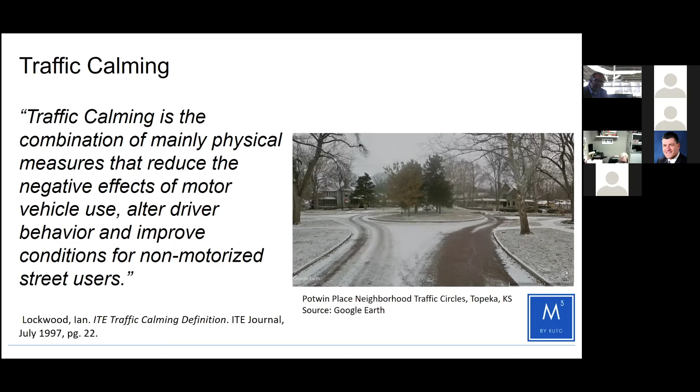So this presentation is about traffic calming. I'm going to give an overview of traffic calming before we get into more about the North Vine Street project in Hays. So what is traffic calming? Well, the definition in the ITE journal back in 1997: traffic calming is the combination of mainly physical measures that reduce the negative effects of motor vehicle use, alter driver behavior, and improve conditions for non-motorized street users. So it's using things that'll impact driver speeds like geometry or narrowing lanes, or changing the vertical alignment or the horizontal alignment, things that are just going to get drivers to slow down. And what that does is make it more interactive with pedestrians and bicyclists and just makes things overall safer.

What I have here on the screen is a photo of some traffic circles in the Potwin Place neighborhood in Topeka. The homes in this neighborhood were built in the late 1800s. From my knowledge of this area, these were actually put in to do traffic calming for horse and buggy, so that horses pulling a buggy wouldn't just take off and go loose through the neighborhood on these streets. So literally they built these traffic circles, and these are brick streets, for traffic calming, so they can control those horse and buggies. So traffic calming has been around a long time, and we'll go into more details here.

So again, why would we do traffic calming? Well, when you control traffic speeds, if there are pedestrian or bicycle crashes, the chances of survival go way up if the speeds are low, and it just makes sense. As the speeds come down, you have more non-severe injuries. As the speeds go up, you have more severe injuries. And then up around 35 miles per hour and over, if you get hit as a bicyclist or a pedestrian, unless certain circumstances arise, it's not good. It's probably going to end up in a fatality.

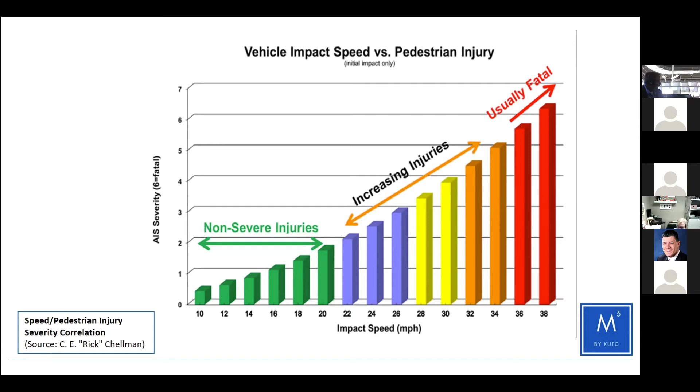So I've got a short video here that talks a little more about traffic calming. It's about 4 minutes long.

Traffic calming is any change we make to a street so that motorists drive in a more civil fashion. What that does is it signals to drivers that they need to slow down, be aware that they aren't dominant in a certain environment. And traffic calming is infrastructure to make sure that happens. Is the infrastructure going to serve the pedestrian as well as the automobile, or is our pedestrian infrastructure going to continue to be shaved down so that more vehicles can move as fast as they want? Adding bike lanes.

Anytime we take some of the physical width out of the street, we're really doing traffic calming. In New York City, they've recently released studies to show that streets that have bike lanes on them reduced killed or significant injured crashes between vehicles and pedestrians by up to 40%.

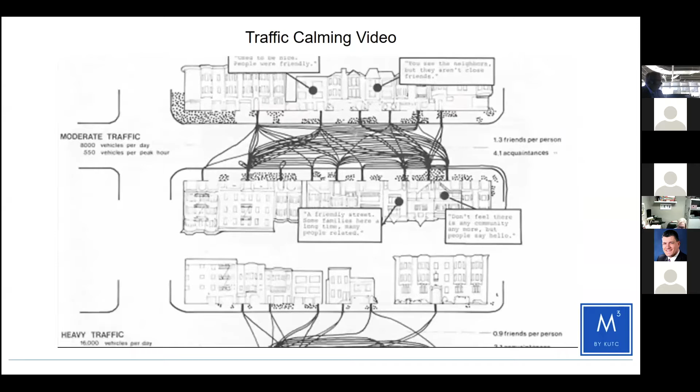Traffic calming actually had its origins in the United States in Berkeley, or Donald Appleyard, the original researcher that did most of his work in Europe, brought traffic calming to the United States. We have mini circles, a number of curb extensions, chicanes, through streets, and a whole other gaggle of different treatments that have been tried and worked very well in Berkeley.

We were able to create this one-of-a-kind initiative on Marine Drive to radically narrow a street. Traffic would race down the street with huge population density on one side and all the Park District amenities on the other side of the street. So this obviously was a problem.

So the street was narrowed and bump outs were created. It's reduced heat holding infrastructure. It's made a profound difference in the ability to get to and from the park. And it's beautiful. It has become a wonderful, wonderful model for the rest of the city.

In New Jersey, there's a state law that says you can't park within 25 feet of a crosswalk. These two orange poles that are installed on the street, one in front of me and one behind me, are Hoboken daylighting poles, to physically prevent all but the most adamant drivers from parking in this location. The importance of that law and the importance of having these poles here is it improves the visibility between drivers coming down the roadway and pedestrians that are entering the crosswalk.

I'm standing just on the edge of a bicycle lane that's 5 foot wide on a street that was previously 16 feet wide for travel lane. That 16-foot wide travel lane is actually wider than the travel lanes on the New Jersey Turnpike, which have design speeds of 75 to 80 miles an hour. We made the argument that by putting in a 5-foot wide bike lane, you squeeze the travel lane of vehicles down to 11 feet. That's a much more appropriate lane width for vehicles in an urban environment, and so it has an inherent traffic calming effect.

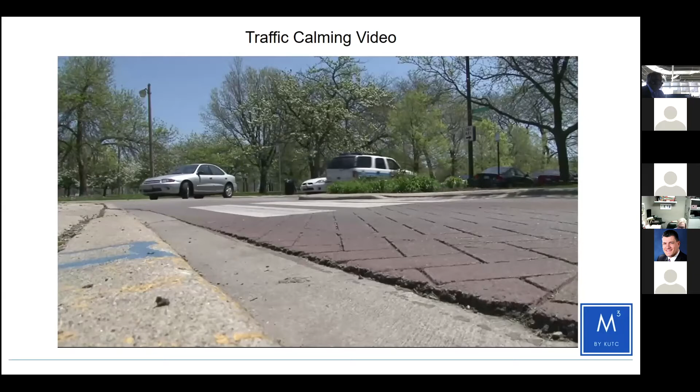Signs don't do the job. Even having police officers on the corner does not do the job. Altering the infrastructure to, as we say, create an even playing field, to force traffic to behave in a more civilized manner is the way that it has to go.

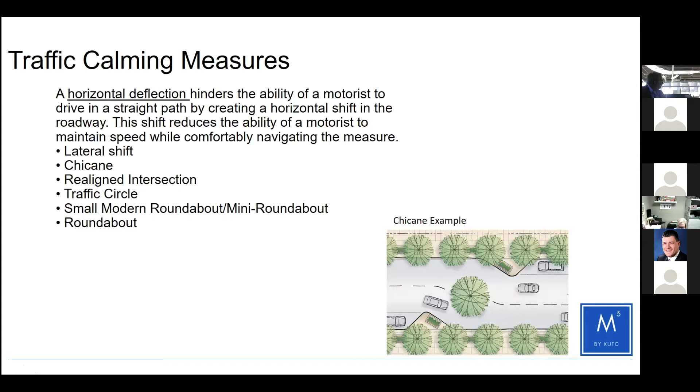All right, so that video gave a good overview of traffic calming techniques and reasons why it's so important. And so I just wanted to note a lot of the examples that they showed in the video. For instance, horizontal deflection are things that will cause vehicles to slow down. And here's an example of a chicane. So any type of lateral shift, realigned intersection or traffic circle, a modern roundabout or even a mini roundabout in more neighborhood areas, get the vehicle to change their horizontal direction.

Also, getting the vehicle to change its vertical direction. So things like speed humps, speed cushions, speed tables. Here's a raised crosswalk example here, a raised intersection, anything that will get the driver to slow down because they just feel like they need to go over the bump or the hump.

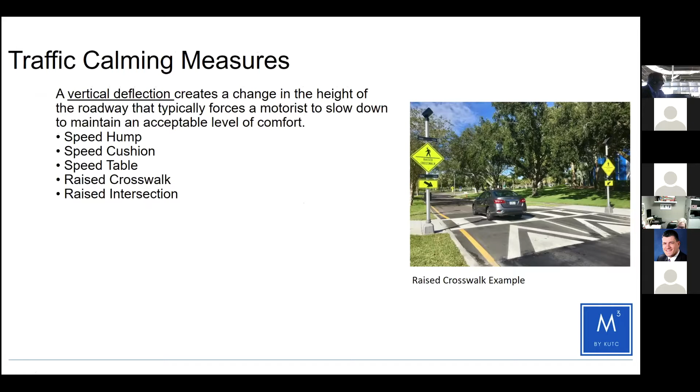Also, street width reduction. They talked about things like corner extensions or bulb outs at your intersections or crossings, chokers, median islands. Here's an example of a pedestrian crossing with a median island, which just allows some pedestrian refuge area through there, as well as some rectangular rapid flashing beacons.

On-street parking, anything that narrows that driving environment is going to get the vehicle to slow down. And that's why people feel comfortable driving 80 miles per hour on the interstate. It's wide open. And that's why you don't feel comfortable driving fast through the main street of a downtown city.

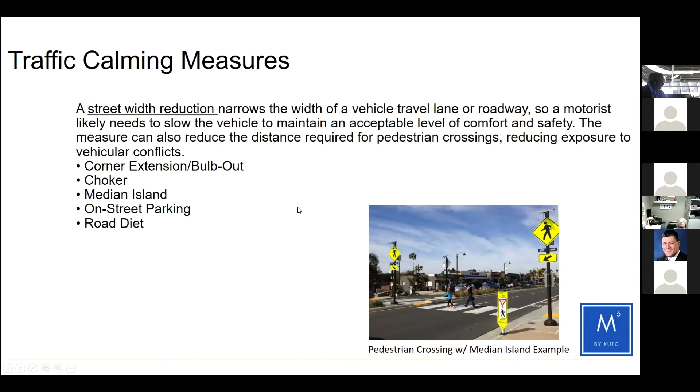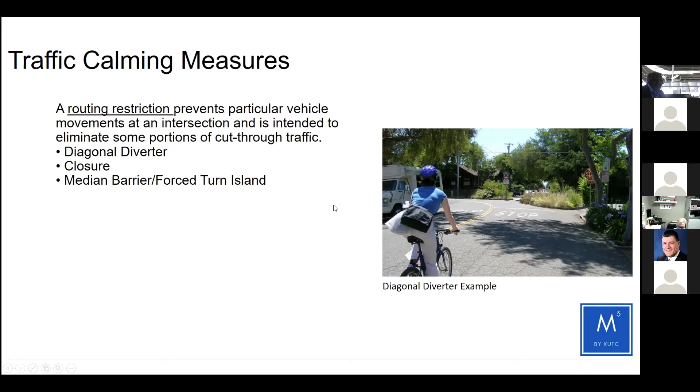And also just changing the intersection or changing the direction of the route entirely. So things like diagonal diverters. Now, this used to be an intersection that went straight through, but they've actually created some things here in the middle that would require drivers to turn left and turn right coming from this direction, but bicycles and pedestrians can get through. So anything like that is going to also slow vehicles down and divert traffic.

So one example leading up to the Vine Street project that WSP has been involved with is a corridor in North Kansas City called Armour Road. Armour Road is right in the downtown area of North Kansas City, but it's like a commercial area. And as you go east, it's essentially a MoDOT route as well that connects in with I-35 on the east side. So here you've got an arterial in a downtown city in Kansas City, a 4-lane section with left turn lanes. It's a signalized corridor.

It has a lot of crashes. The vehicles per day is like 15,000 vehicles per day. That's quite a bit of traffic for an arterial of this type. And they really needed ped bike improvements and a need for traffic calming. So that was the before picture. Here's the after picture where they've converted it to a 3-lane section. They've included on-street parking.

Traffic speeds have gone down by around 5 miles per hour. Crashes have been reduced and severity has been reduced. However, travel times remain the same, which is good. And there were some folks within North Kansas City that were very concerned that, okay, you're going to take a 4-lane and make it a 3-lane. You're taking away 2 through lanes of traffic. It slowed folks down, but it made things safer, and it didn't really change the travel time. And the benefit to cost of these improvements was around 18 to 1.

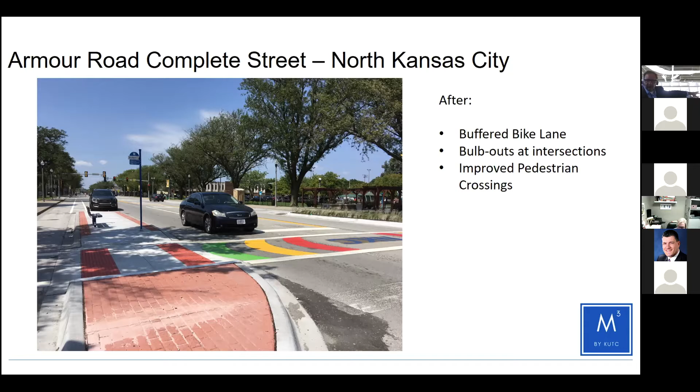Not only that, but you have a buffered bike lane on the other side of parking, between the parking and the sidewalk. You also have some improved crosswalks with some bulb outs. And don't look at those pavement markings. I think they have some colored pavement markings out there. If you're a MUTCD aficionado, those don't meet the manual, but it's not something to be concerned about.

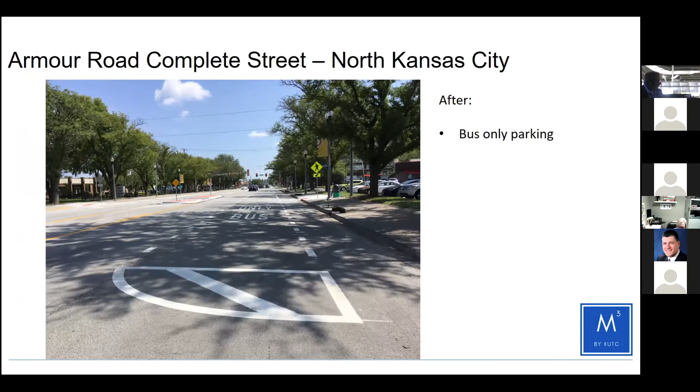Also, they had some bus only parking out there as well, which is great for transit. So they turned it into a complete street that was better for bikes, peds, and transit, as well as keeping it safer for motorists and making it an overall more pleasant corridor to travel on.

Okay, let's talk about City of Hays and the North Vine Street project. So most of you, if you live in Kansas and you've been to Colorado or out towards Western Kansas, you've probably stopped at Hays. Hays is the midpoint between Kansas City and Denver. And it seems like if you're traveling on I-70, no matter where you're coming from, you typically stop in Hays to get gas or to get some food. And you stop on Vine Street, which is also US 183.

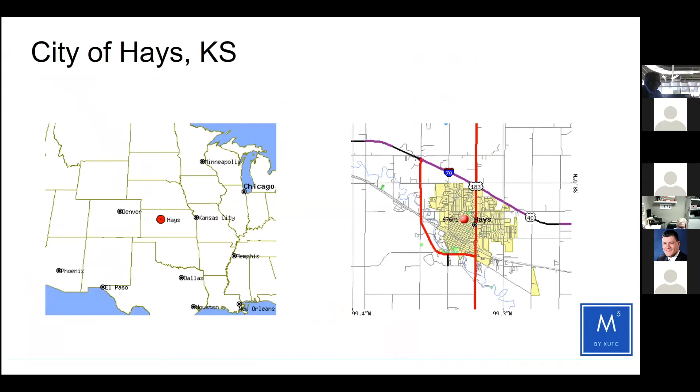And if you haven't spent much time in Hays, maybe you've stopped for gas or something, it has a really great culture. And I just wanted to share a little more about the culture of Hays, Kansas.

Here in Hays, we appreciate the little things, like a good meal shared with friends, and time outdoors that restores. We're also fans of the truly Hays things, like our talents and our history. We love exploring the new things as well as the old. So spend some quality time in Hays and enjoy the best things with us.

All right, and there was that little depiction of folks playing some instruments, and I'm not kidding. As part of the project, when we were out there one time, a group of us went to dinner downtown and came out of the restaurant, and all of a sudden we hear this music playing. So we walk about half a block away, and there was a gazebo set up at the park, and the city band was playing a concert right there in the gazebo. And so we hung out there for a while and listened to the band.

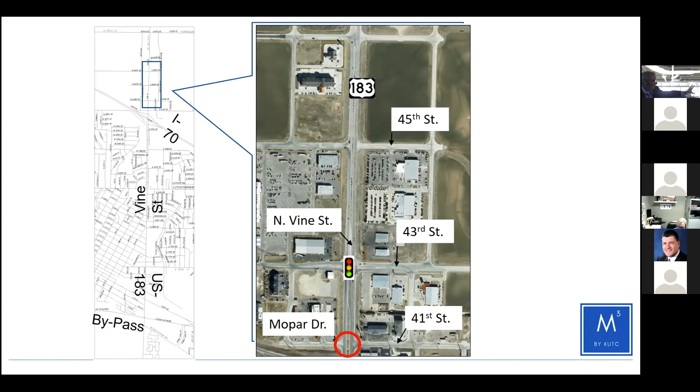So north of I-70, North Vine Street has developed over the last 10 years or more, let's say. However, some really good planning went on here. That's where the city was able to get some funding through KDOT to, instead of building frontage roads, build backage roads. The roads paralleling Vine Street are backage roads, so that you have good access management off of North Vine. Your only connections are to the city streets, and then folks get access to the businesses via the backage roads instead of on North Vine Street. So very good planning north of I-70.

But again, this is the intersection of 37th and Vine, right adjacent to that hotel that needed to be redeveloped. And there's a lot of problems there. It's a two-way stop. You've got a roadway that comes in from the northeast and connects into North Vine as well. And during peak times of the day, it's just mass chaos here. If you've ever been through there, you know what I'm talking about.

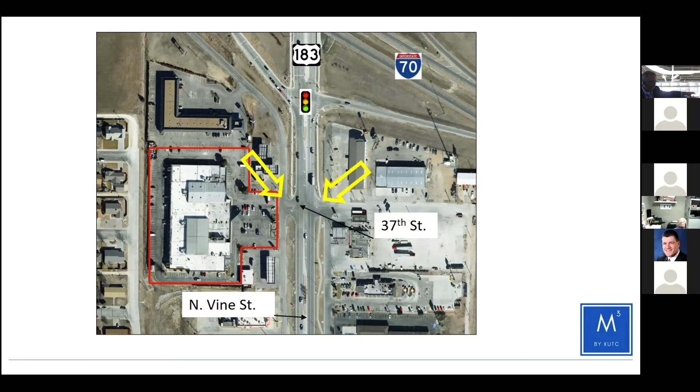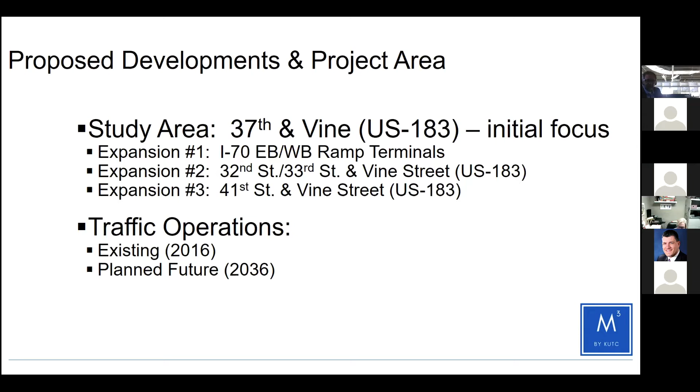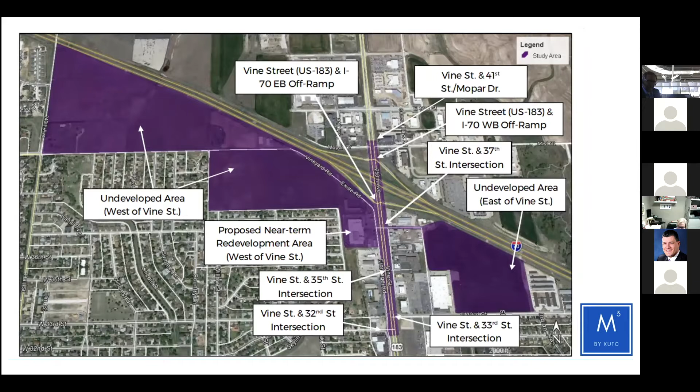So the city hired WSP to do a corridor study. Initially, it was just focused on 37th and Vine. However, it expanded all the way down to the intersection of 32nd and 33rd, all the way up north to 41st Street. Existing traffic was 2016, and planned future traffic was 2036. There's a lot of undeveloped property through here, so we had to make assumptions on how that property would be developed, then create trips, and then distribute those trips along the Vine Street corridor so that we could do analysis on future conditions.

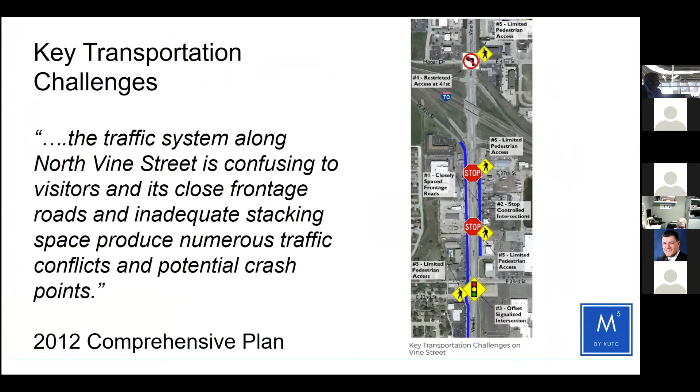And key challenges along North Vine Street, as the 2012 comprehensive plan said, were that the traffic system along North Vine Street is confusing to visitors. Its close frontage roads and inadequate stacking space produce numerous traffic conflicts and potential crash points. And they're not potential crash points, they're real crash points, because I'll show you later how many crashes we have along this corridor. Also, it's very non-pedestrian friendly, and we'll talk more about that in a minute.

So this is the intersection of 37th and Vine during a peak period. The main road is here. This is the closely spaced frontage road. And you try to figure out who's got the right of way in a situation like that, and it's hard to do. I even saw some people that were trying to access Vine Street and just decided they couldn't. They actually looked, backed out, and just took the frontage road to some other connection.

They're having traffic congestion during peak times. This is North Vine Street northbound during the PM peak, and you've got traffic backing up all the way past 37th. So when you back traffic up through the intersection of 37th, that's already a chaotic mess, it just makes things even worse. The other thing is that this is a route that oversized and overweight loads, permitted loads, are routed through. So here's a wind blade that's on North Vine Street.

So all that mixture of congestion and conflict points and so forth have resulted in 120 crashes during the time period that we looked at, 2012 to 2015, and resulting in 17 injuries along the corridor. And it included everything, there were crashes all along the corridor, mainly focused on those intersections.

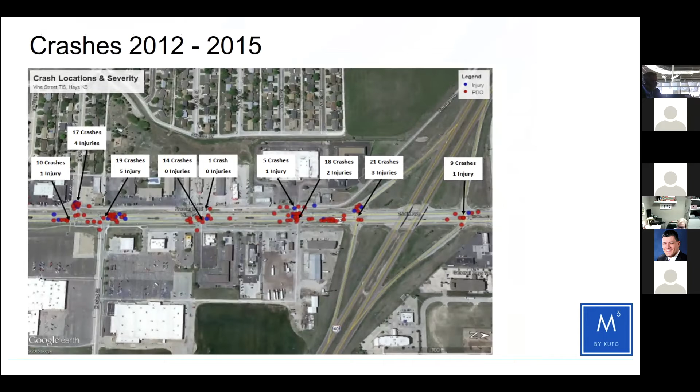So we developed a Vissim model, a microsimulation model to model existing conditions. Currently, Vine Street's signed posted speed limit is 35 miles per hour, but really the operating speed is somewhere between 35 and 40. And when you start getting up in that 40 range again, the chances of having a fatality or serious injury with a pedestrian or bicyclist really goes up, just like we talked about. So anyway, we modeled existing conditions.

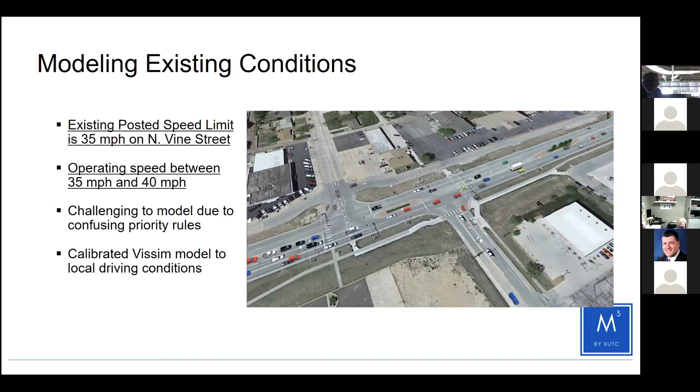Pedestrian movement is really restricted. There's a sidewalk on the east side of Vine Street. However, on the west side, there was no sidewalk. Buses would get off the interstate full of kids or the elderly. They would park on the frontage roads in these sandy areas where they had room to park a bus. And then unfortunately, they'd park on the west side, and then there's no mid-block

crossings through here. So here you're having 20 or 30 kids that are trying to cross Vine Street because they want to go to McDonald's. The bus didn't park at McDonald's, and it makes you cringe. Every time I was out there and I saw that, it's like, oh my gosh, somebody is going to get hurt. Just not good at all.

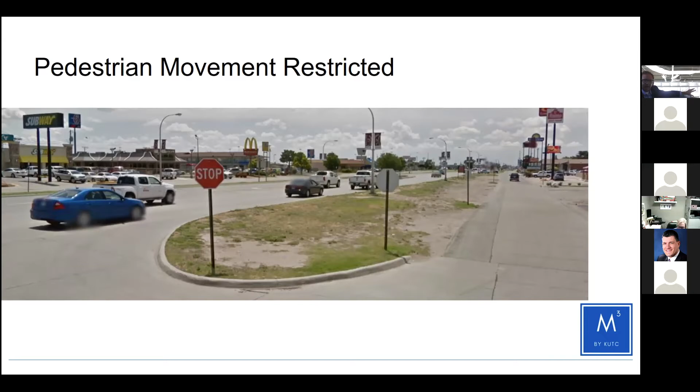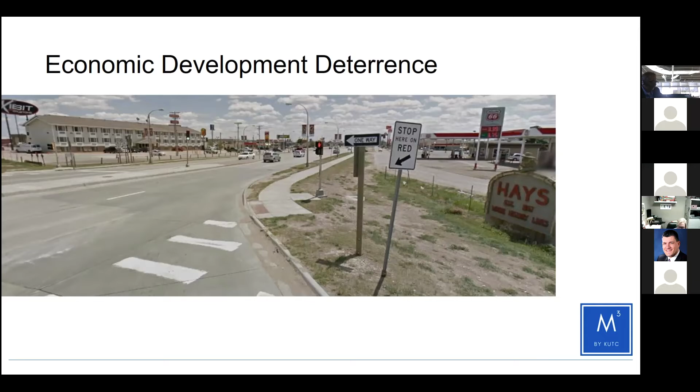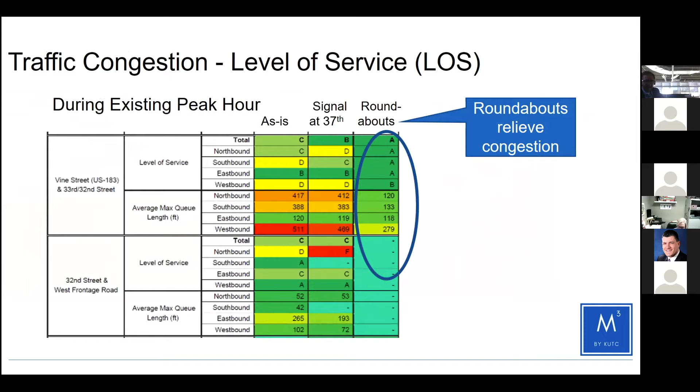Economic development deterrence, because Vine Street had a reputation of being congested, it makes it harder for new developers to come in and want to redevelop there. So the need to do something was really imminent. So we looked at different alternatives. We looked at existing conditions. We looked at adding a signal at 37th Street and Vine, which just made it worse. And we also looked at some roundabout options.

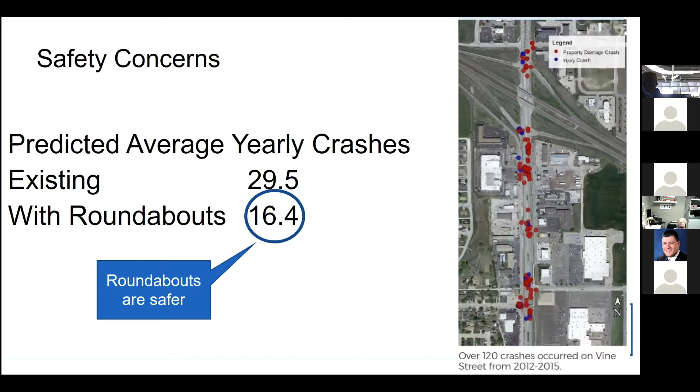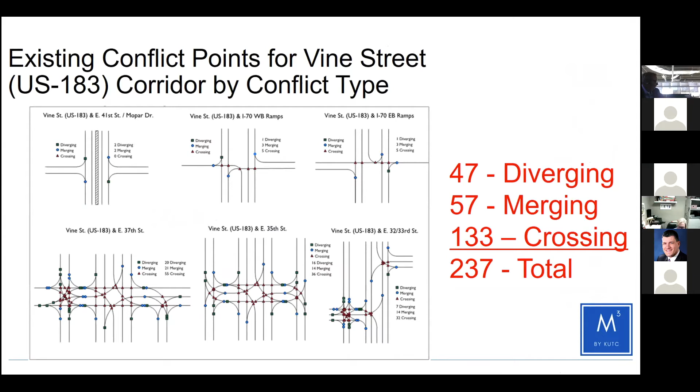When we predicted average yearly crashes, existing was around 30 crashes per year on the corridor. And with roundabouts and using the Highway Safety Manual, the number of crashes was going to be reduced in half, and the severity was going to be really reduced. And just looking at conflict points, there's all sorts of conflict points along the corridor. And if you add in all the different types, the most important are the crossing, because those are where you have your T-bone angle accidents that'll result in higher injuries and fatalities, but a total of 237 conflict points.

So the design criteria, we had to use the Kansas Roundabout Guide. The toughest thing we had to do was to design this to handle large semi-commercial vehicles, WB67s that are right on the interstate, side by side through the roundabouts. So we had to make the lanes a little wider in the roundabouts to accommodate that. And also we had to accommodate wind blades or wind tower sections that would take up 2 lanes through the roundabouts. We did fastest path analysis.

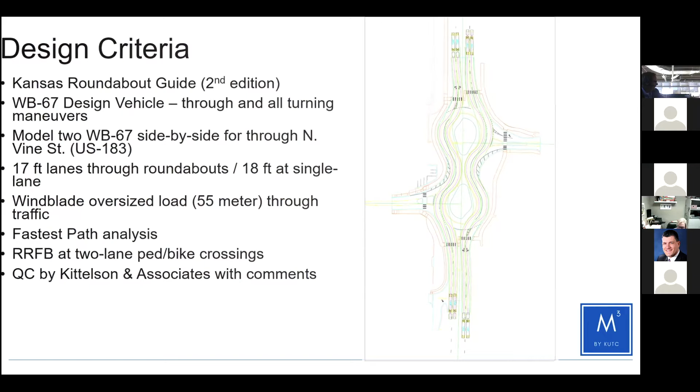So you're saying that a vehicle is going to not stay in their lane, they're going to switch lanes and just use the fastest path to get through. So we had to make sure the roundabouts could handle trucks, but keep the fastest path speeds down on all those entry and exit and circulating points.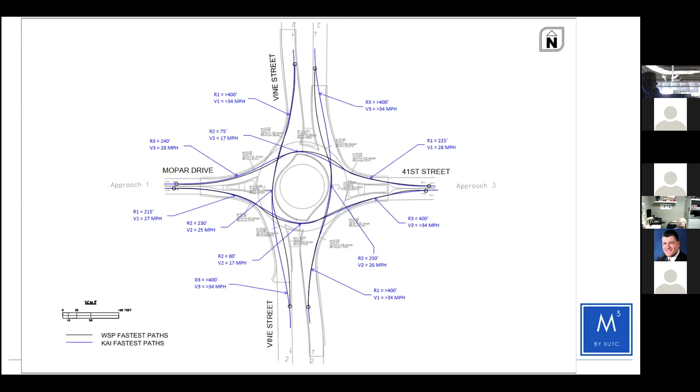So if we look at the area around the I-70 interchange, we've got 41st Street or Mopar Drive just north of I-70. This was only a right in, right out access. But the city talked to KDOT and was able to get permission to open this up, which is going to open up opportunities for development to the east and west of Mopar Drive.

And the interesting thing is what we did for the westbound exit to Vine was, instead of putting a roundabout here as well, we're getting folks lined up in the proper lanes on the ramp, and then everybody has to turn right. And so if you want to go south on Vine, you're going to get on the inside off-ramp lane, turn right, make the U-turn at the roundabout at Mopar Drive, and then come south.

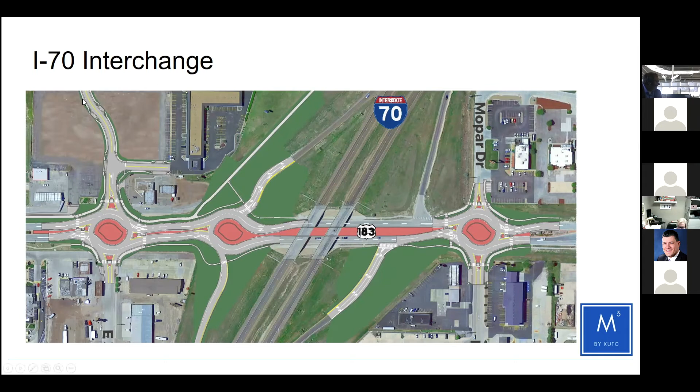And if you want to go through, or if you want to turn right, you just get in the right lane. So we have overhead signs that are going to tell people which lane they need to be in, as well as signs here in the median. So we have this. We also have a teardrop roundabout at the off-ramp, and then here's our 37th Street intersection with 37th Street extending to the west, and we'll talk more about that in a minute.

So, yep, we talked about Mopar Drive here and what that does. Then the teardrop. And then here's the roundabout at 37th, which started the whole study. And the cool thing is, and this matched up with their 2012 comprehensive plan, was we extended 37th to Skyline Drive, which is a residential neighborhood.

We also took 41st Street, which did come down and intersect right through here, and tied it into Skyline Drive up here. So all these folks from the neighborhood are going to have great pedestrian and bicycle access to the Vine Street corridor, which previously they just didn't have access to. So now they can walk, they can bike, and it's tied into a much more connected pedestrian and bicycle system.

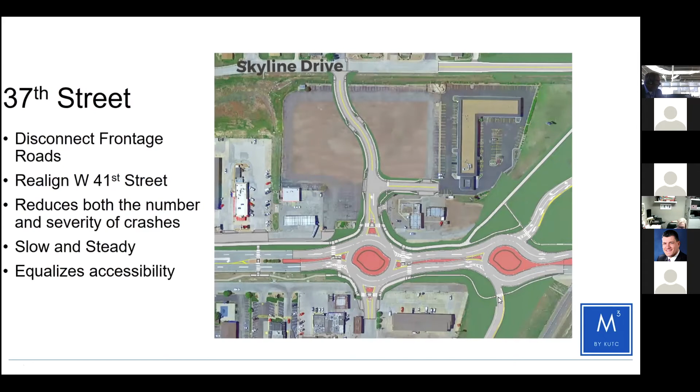Then as we go south, we have the intersection with 35th Street. This is what's called a three-quarter access, which means that you can turn left off of Vine Street into the development, but you can't turn left out. You have to turn right out of 35th Street. But the cool thing is, and we got the idea for this from a webinar that was done around this time on access management and roundabouts.

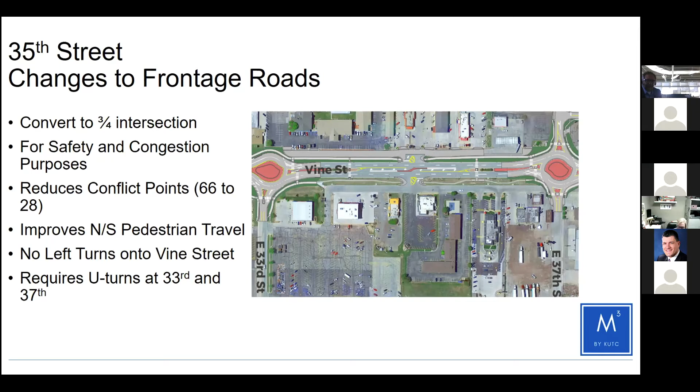This is a great mixture of access management and roundabouts, where the folks turning right can make the U-turn if they want to go south on Vine. And the same thing coming from the west as well. You turn right, and if you want to make a U-turn, you go through this roundabout and come back. So we're essentially creating a system here that not only is cutting down conflict points, but it really is restricting left turns. And it's basically making those right turn U-turns.

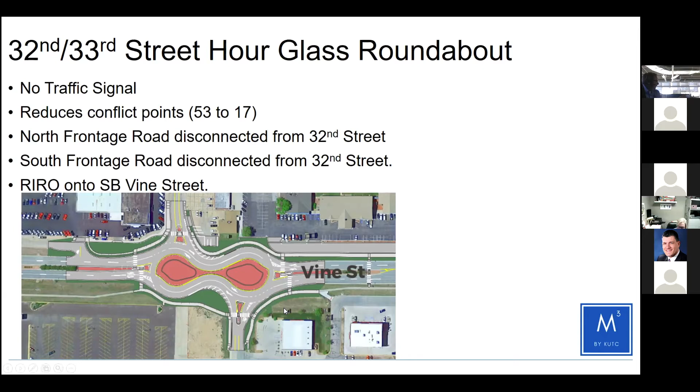And then the final roundabout on the south end, where we had two signals, is what we call this hourglass shape roundabout. And this is very unique. It's one of the only multi-lane roundabouts of this type that we know of. I think we found one other back east, but most that are shaped this way are just single lane. And so we felt like this was really going to improve traffic flow, but also with the pedestrian crossings, improve safety for folks crossing down at these intersections.

So just a little bit, we went ahead and modeled, we used Vissim to model what it would look like to drive through the corridor with roundabouts. And essentially what we're doing with regard to traffic calming is changing the horizontal direction of traffic such that this is a much more curvy corridor instead of a straight corridor. And when you get this driver's eye view, that's exactly what it is.

Now, there are some tangent sections in between the roundabouts. However, we do have some mid-block crossings that are going to get the driver's attention, and then we're going right back into another roundabout. This is at 37th Street here. So just by changing the horizontal position of the vehicle, the drivers are having to slow down. We think that this is going to divert a lot of trucks.

When the Vine Street project won a BUILD grant in 2018, the very next year, the county won a BUILD grant to complete a 183 bypass to the north and west. So Hays right now has a 183 bypass that goes from Vine on the south up to I-70 on the west, but it hadn't been completed. And so that northwest bypass is being constructed right now.

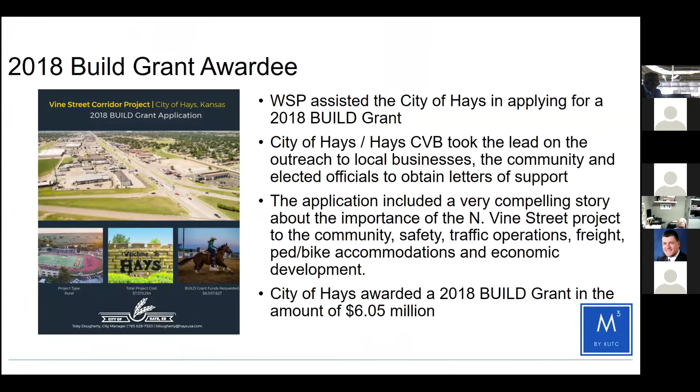So we did help the city apply for a BUILD grant in 2018, of which the city took the lead on a lot of getting the letters of support and doing the public outreach and all that. And we found out later in 2018 that they were selected for a federal BUILD grant in the amount of just over $6 million.

This project was let to a contractor in March of 2020, right when the pandemic was starting to hit. And so not the best time. Half the plan set was temporary traffic control plans because the city was not going to allow the closure of on and off ramps. They wanted things phased very specifically such that you could keep traffic flowing during construction.

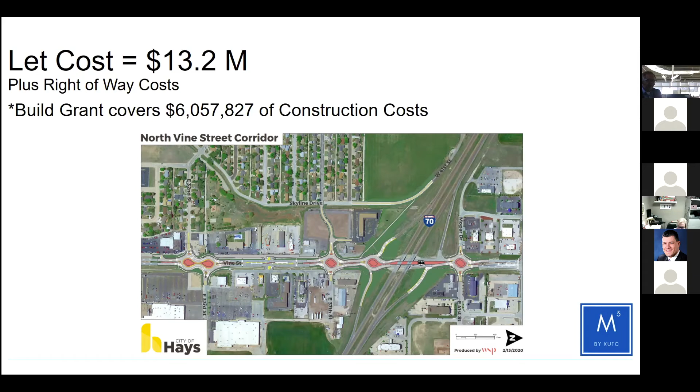And so with all that detail, it left little flexibility to the contractor. So we think we saw some increased bids for that, as well as the uncertainty with regard to materials costs and other things with regard to the pandemic that was getting ready to hit.

So just to carry through a little bit on construction, then I want to show a couple of videos. It's a 2-year construction phase. The first year focused on 32nd and 33rd Street down on the south end, and building the West Frontage Road, tying in 41st Street and extending 37th Street.

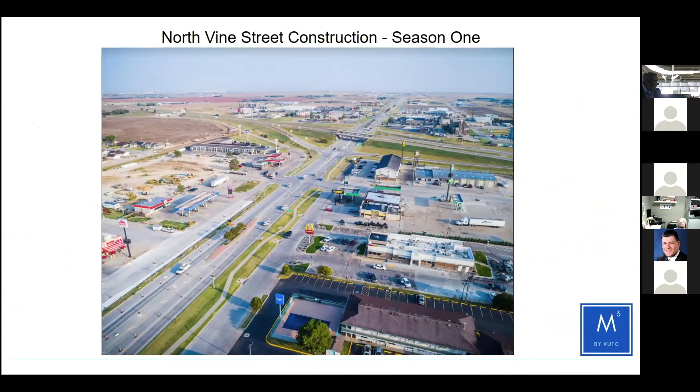Kirk and Michael has a drone that they would fly the corridor every week and take drone photos of construction. This is year 1 starting. And you can see them constructing the roundabouts there at 32nd and 33rd Street. So Vine Street's starting to look curvy through here while they have traffic on the other side.

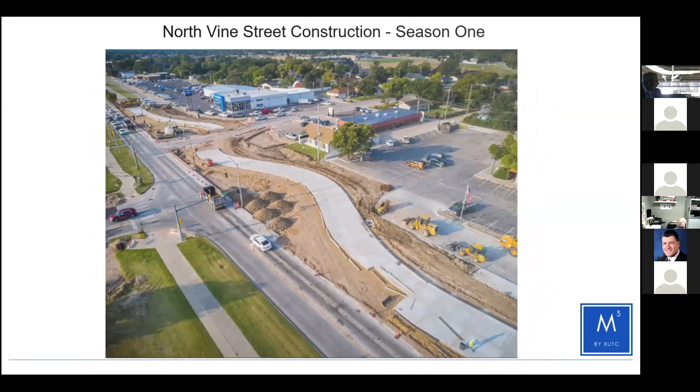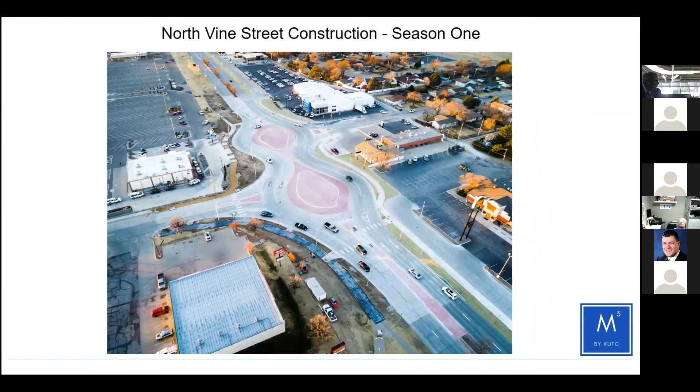And this is what the 32nd and 33rd Street roundabout looks like when they completed it in December of 2020. And that was the first roundabout to open up. So just want to share a second of the day that the roundabout opened.

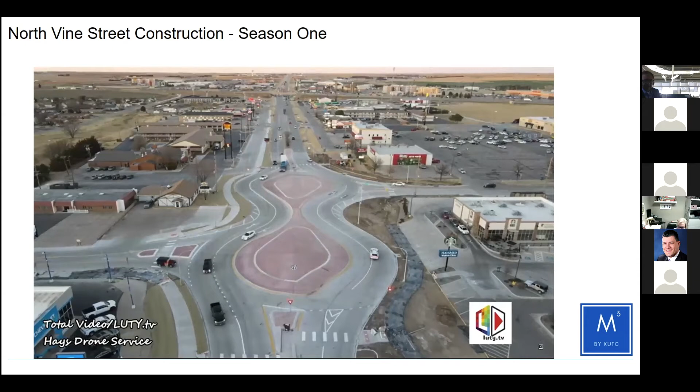I can't tell you how satisfying it is to see. When roundabouts are used properly, they really work well. And to see traffic slowing down through here, when they say traffic calming, to me, it's just much more calming to watch traffic through here, to drive through here. And you can see the semi getting through.

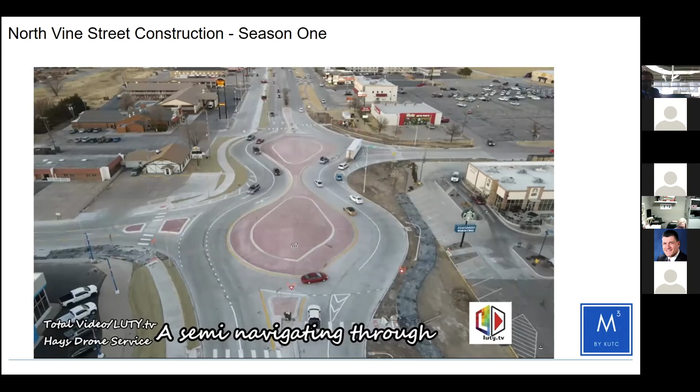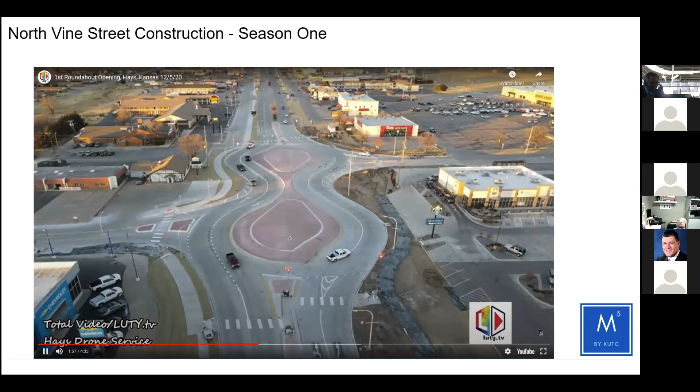And so as a traffic engineer, it's just an amazing thing to see that what you planned and modeled and hoped would work actually works. And you can see traffic is kind of staying out of the way of that semi, which I would too. So this video is on YouTube. If you just look up North Vine Street Roundabout, you can find it pretty easily.

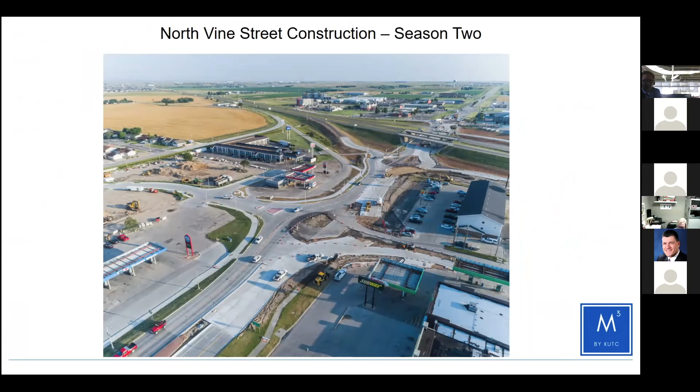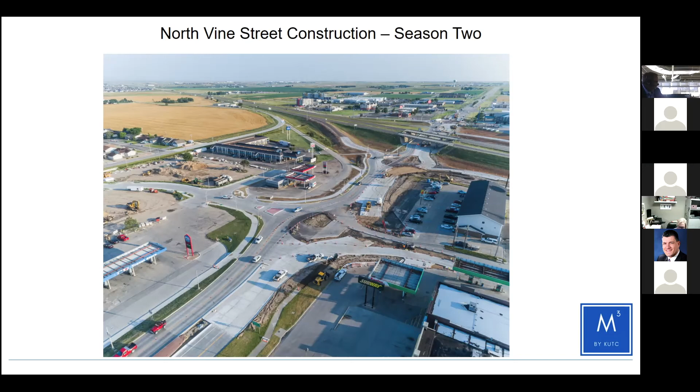And the thing I love about it is it's training folks to drive through the corridor without them even knowing that they're being trained, because they're having to drive through these partial roundabouts as they're being constructed. They're having to slow down. There's no left turn signs all over the place. So if you come off an off ramp, you have to turn right. You have to go down to the roundabout on the south end to make a U-turn. And it's just amazing how it works that way.

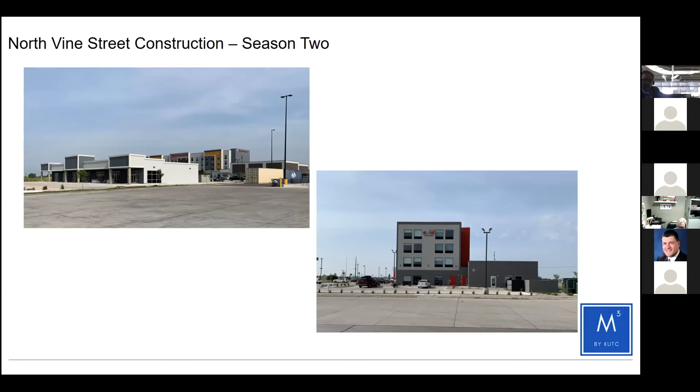But what it's also done is it's allowed the city and property owners to get more redevelopment along the corridor. So this is actually some new buildings and new businesses north of I-70 on the west side of the corridor, which is great to see. You see many more sidewalks; this is the sidewalk on 37th tying into the neighborhood to the west.

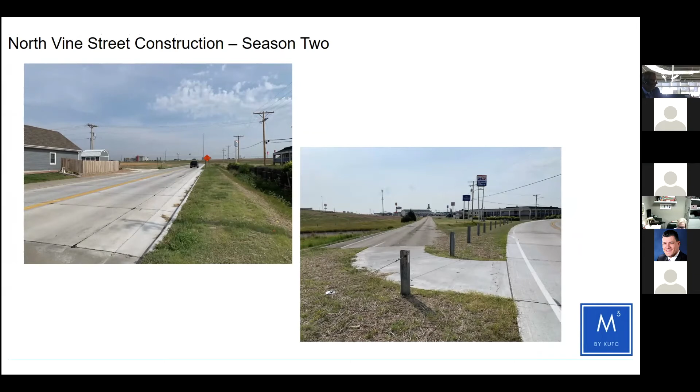We left a segment of 41st Street there instead of tearing it out, and it's only going to be for bikes and peds. So that's the photo on the right. So vehicles can't drive on that. That's only for bikes and peds. More sidewalk, lots and lots of sidewalk. We have some mid-block crossings that are going to have RRFBs.

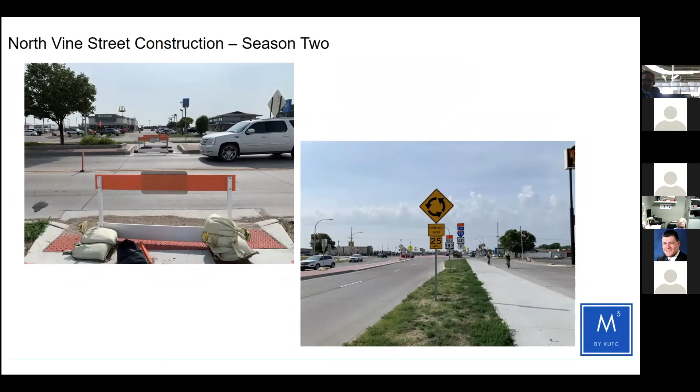Just wanted to share this video real quick. This is a ground view of the roundabout there, people turning in on the south end.

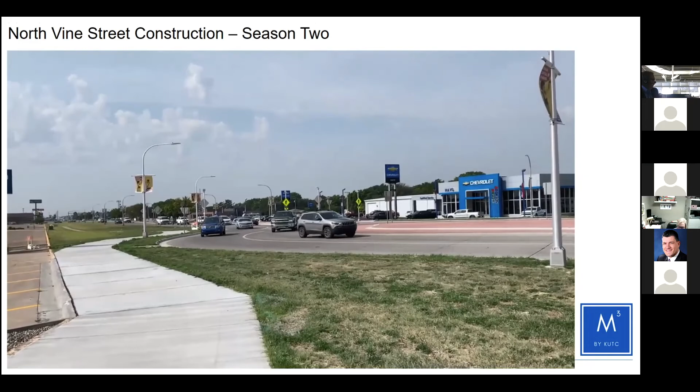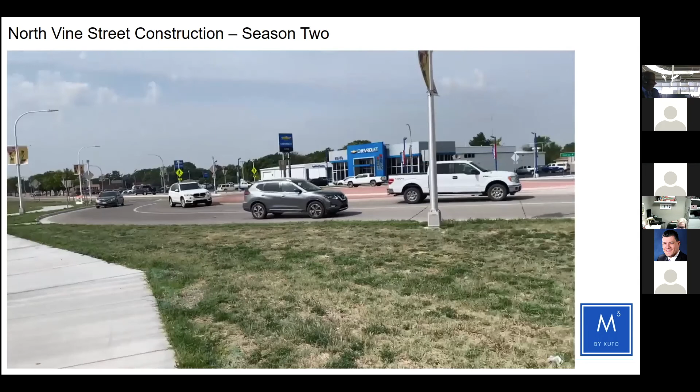And again, folks are slowing down to get through, which is improving things for bikes and peds. I think just prior to me shooting this, I saw some peds using the crossing to the south there, where the pedestrian signs are, and it's a rectangular rapid flashing beacon, so it flashes and vehicles stopped and let them go ahead and cross very easily. So I was real happy with what I was seeing out there.

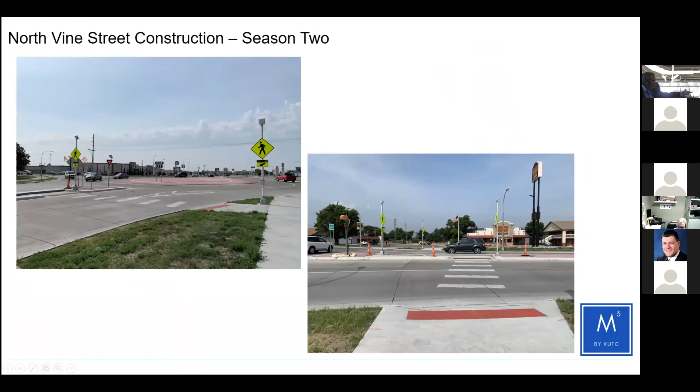Here's a pedestrian crossing at the south roundabout, as well as some more bike and pedestrian infrastructure. This is 35th Street, where folks are having to turn, right in, right out. And real quick, I'm going to show part of this, and then we'll open it up to questions.

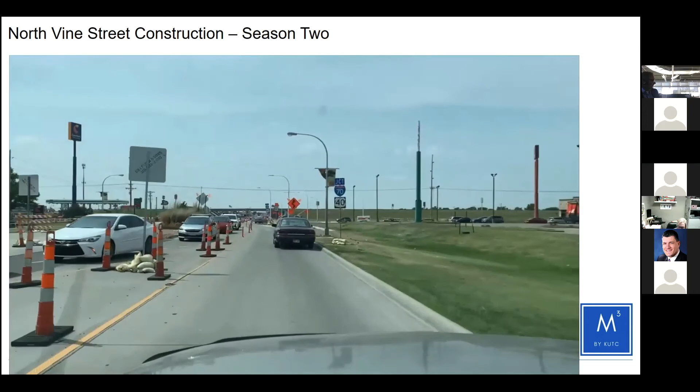So this is me starting up at the signal at 43rd Street, up just north of our corridor here. And the most delay I had in shooting this video was at this traffic signal. So you can see once I start driving through the project, just how curvy Vine Street is going to be.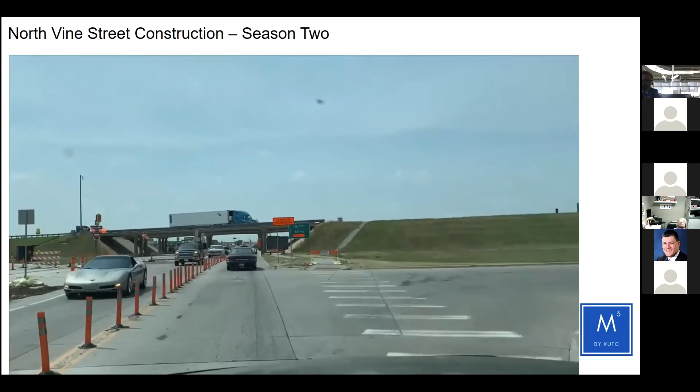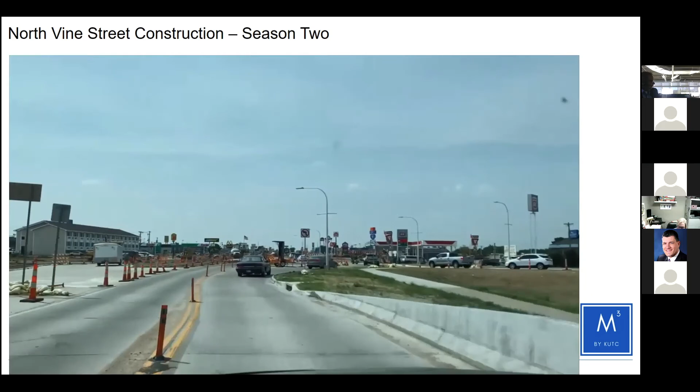And what we're going to ask KDOT to do is do some speed studies afterwards and see if there's a potential for lowering the speed limit from 35 to 30 miles per hour, just because people have changed their operating speeds. So you can see all the no left turn signs. We're going through the part of the teardrop that's been constructed.

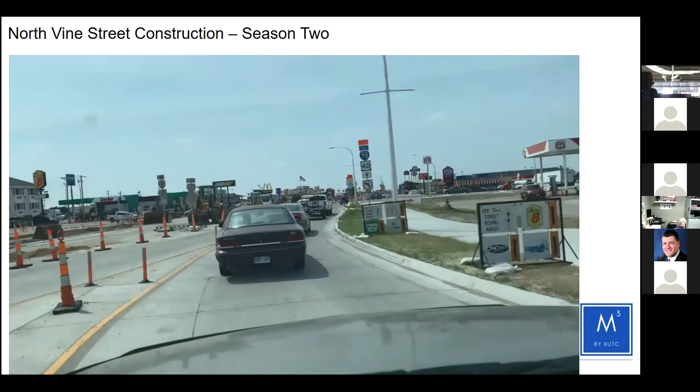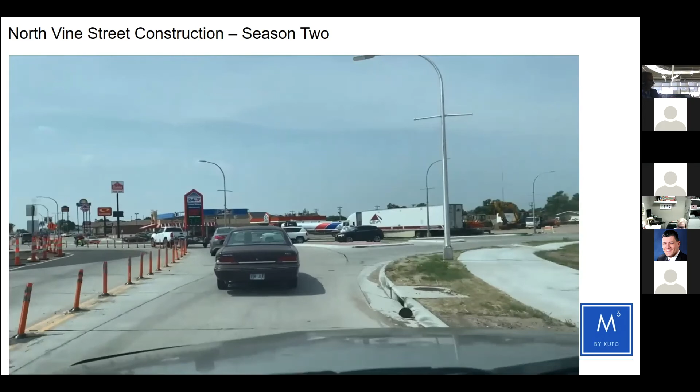There's the Hays sign with a bunch of students climbing on it. Here we're getting ready to go through the 33rd Street roundabout. And again, this is one lane each direction. So with 18,000 vehicles per day, it's really working really well. And this was on a Saturday afternoon in the peak of vacation season.

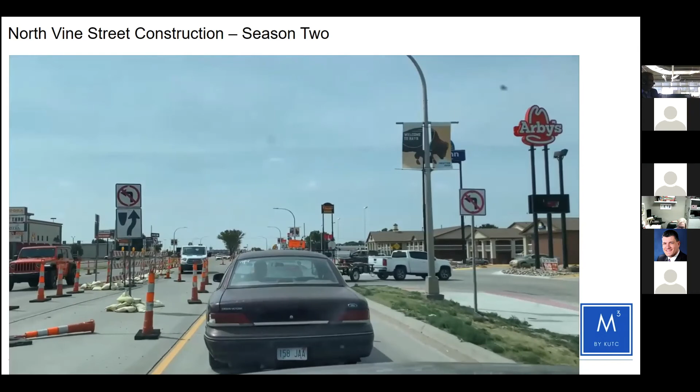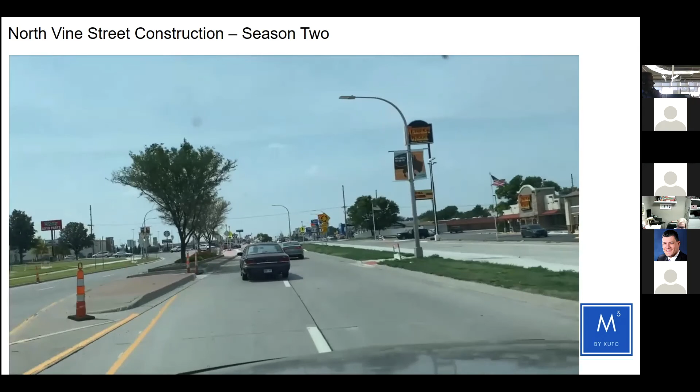So a ton of the plates you see here are folks from Colorado or other places across the country that are just stopping in Hays to get gas or get something to eat over the lunch hour. So there's the 35th Street intersection. Right now they're allowing northbound lefts in, but southbound lefts are not being allowed currently. Now we're getting ready to go through the teardrop roundabout. So I want to make the U-turn and go north.

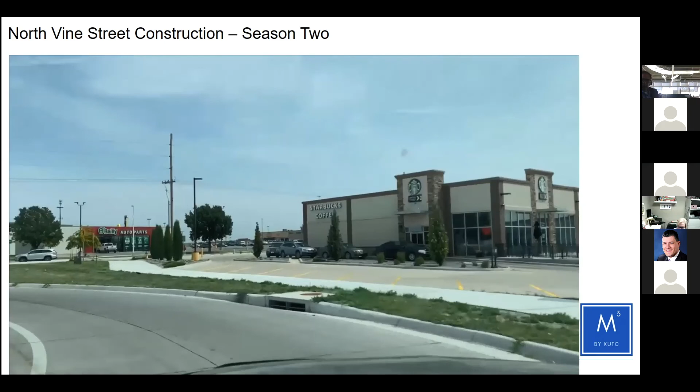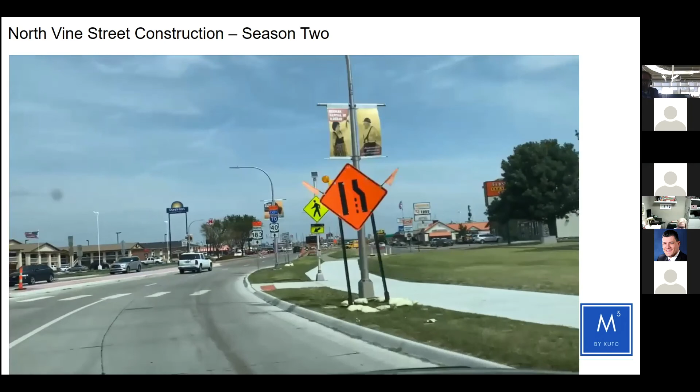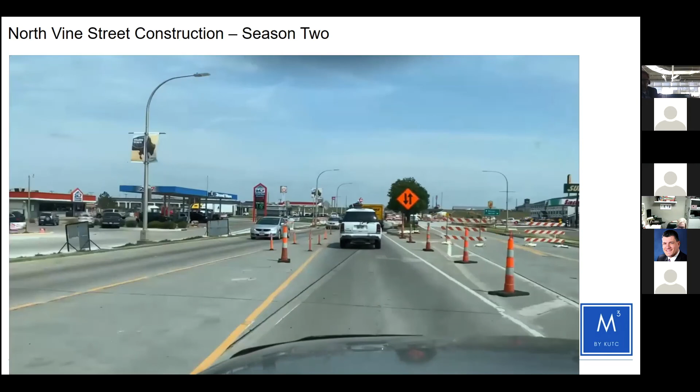And I really want to encourage others to think about using these type of strategies to make improvements to your arterials, because when you do crash analysis within a city, most of your crashes happen on your arterials and not as much on your collectors and your local roads. And so if there's a way that you can cut your conflict points down by a half or more and lower speeds and still get people through and still allow access to businesses, then that's just a benefit for everyone.

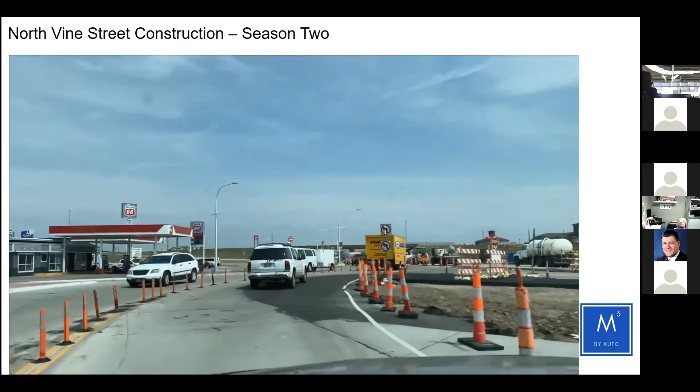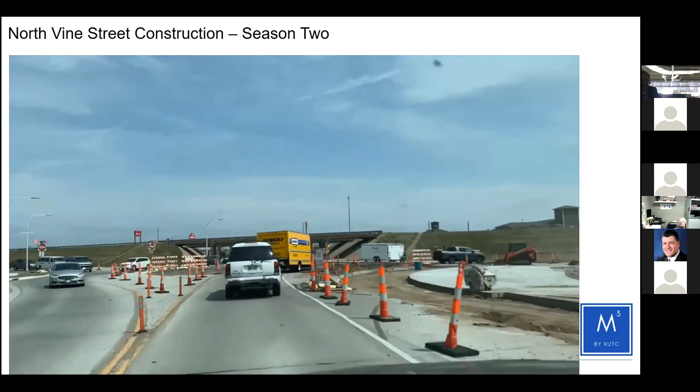And hats off to the city of Hays for taking this giant leap, because at the public meeting, we met with folks and they were generally okay with the concept. It's just they said, why didn't you just pick one intersection to build a roundabout? And why are you doing a whole corridor? Because we're not quite ready for that. But folks are driving through it really well. It looks like it's so far so good.

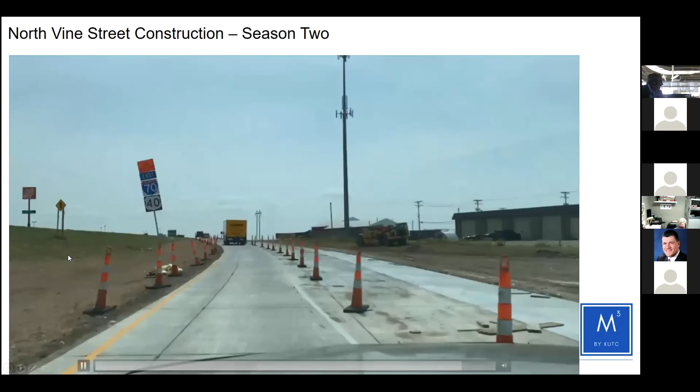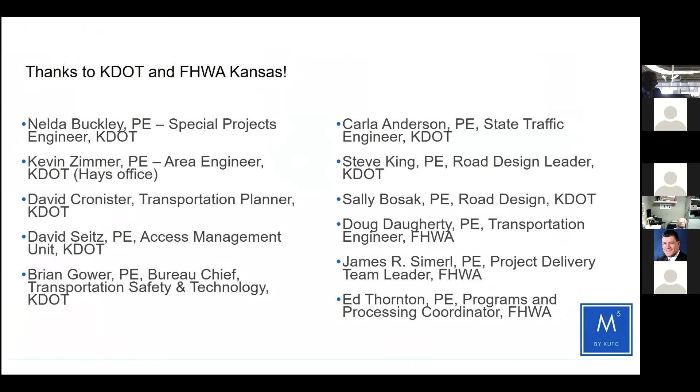So anyway, I just want to thank a lot of folks at KDOT and the FHWA for all their support of this project, because it was a real leap of faith to make these improvements to a major arterial that's also a state highway and to do traffic calming. And so I'd just like to open it up to any questions that anybody might have.

Thanks, David. It does look like we've got a few questions here in the chat. Okay. So Nelda asked, I haven't seen raised crosswalks used much. Are there downsides, drainage issues with that?

Yeah, that's a great question, Nelda. I've seen some raised crosswalks used on some local streets where there's issues with cut through traffic and stuff like that. But definitely, I would think that they would have to do quite an analysis to make sure that the drainage was not going to be an issue, and hopefully things could drain either side of that raised crosswalk versus trying to drain from one side to the other.

So yeah, if you want more information about that, I'd be happy to send you some examples, and I know that they are very effective with getting folks to slow down through the crossing area. But great question about how drainage would take place through there.

All right, it looks like we've got another question here from Mike Spatafor, asking about the Armour Road project and just how is that benefit to cost value calculated? Well, that's a great question, Mike. So in the study that we did, we used the Highway Safety Manual to predict what the crashes would be after the improvements were made. And I believe it was after all of the phases of the improvements were made, not just, let's say, phase 1 or phase 2, but I think all the way to phase 4.